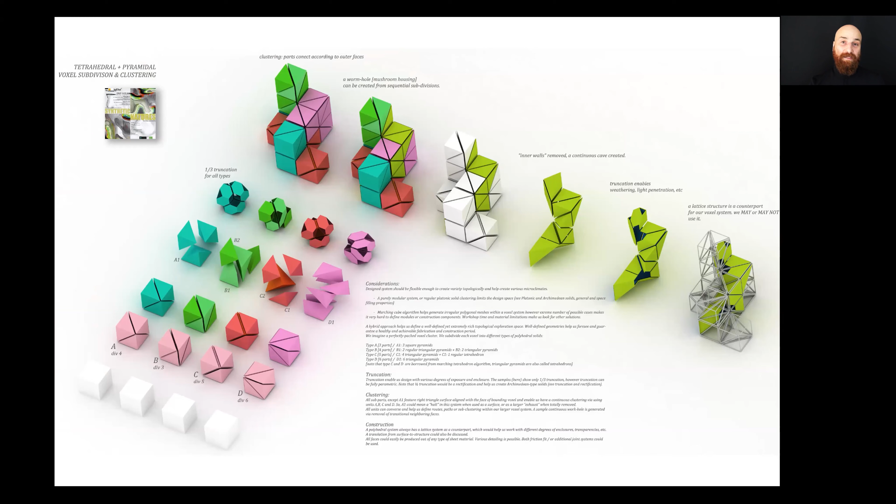I would like to illustrate this idea with a couple of projects that I worked on. The first one is from 2012 when I had a chance to visit Santiago, Chile. The idea in this project was showcasing the potential, the power of digital tools, both in the design realm and the manufacturing realm. In this case, you can take a cube, slice it in different ways, and truncate it in different ways. Then by combining them in different ways, you can build complexity step by step.

At the same time, we were very interested in applying this in computational terms because we had to deal with a sophisticated structure, but also a sophisticated surfacing system that housed electronics as well as some living organisms in it. Here is how it worked.

We picked the spot to put the structure, and then we tried to analyze the environment to see what really happens during the day. That is related to how much sunlight enters a space, what the position of the structure is, and what's going to happen with the living organisms that we put inside the structure.

On the structural side, we really targeted to have something that we could digitally manufacture and assemble without using any kind of adhesive or screws and nails and so on and so forth. So the structures that you see here are really friction fit.

That was a super challenging application on its own, because what you need to do is cut each and every part in really, really tight tolerances, but at the same time make sure that they fit to each other. If it is too small, it wouldn't fit. If it is too large, it would just be loose and not hold the structures together.

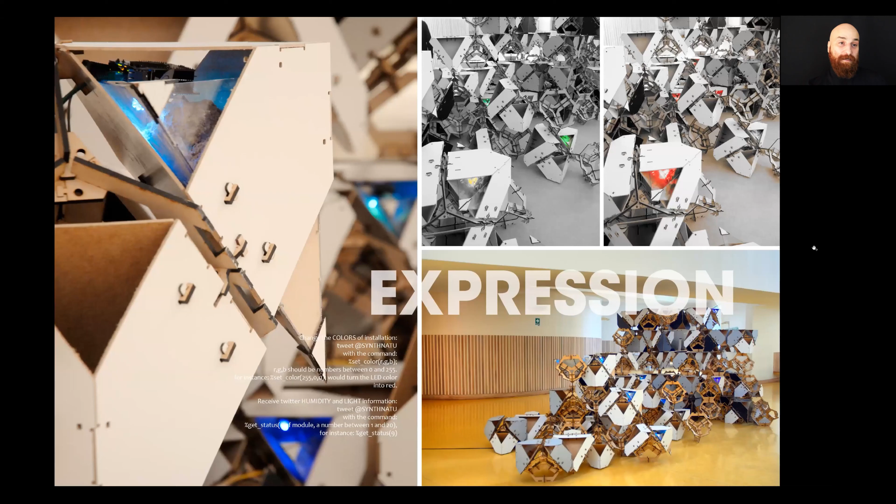On the living organism side, what we did is we put mushroom in those pockets, and the amount of opening in each and every pocket would change depending on the location of the pocket on the structure. Eventually we wanted this to be an interactive sculpture as well, so you would see some LED lights in the structure, and people would tweet some colors to these pockets, and then the mushrooms would tweet back their moisture levels depending on the humidity level that they're at.

So all in all, this was a very interesting learning process for the students who attended this workshop to build the structure. It was a workshop, this was designed, but at the same time we were iterating and reiterating the design as we were building it. So in a way, the design was evolving and transforming over time as we were working on it.

We learned a lot, both in the design process, but also during the manufacturing process. We had to reflect our learning back to the structure and change it whenever needed. So we built this bridge, conversation between the mushrooms and humans, as I explained a second ago. This is a very good example in my mind to show that you have to be very experimental when you're designing things. If we keep doing what we already know, we can only move incrementally. But to take a huge leap in innovation, to come up with new ideas, to be really transformative, we have to experiment.

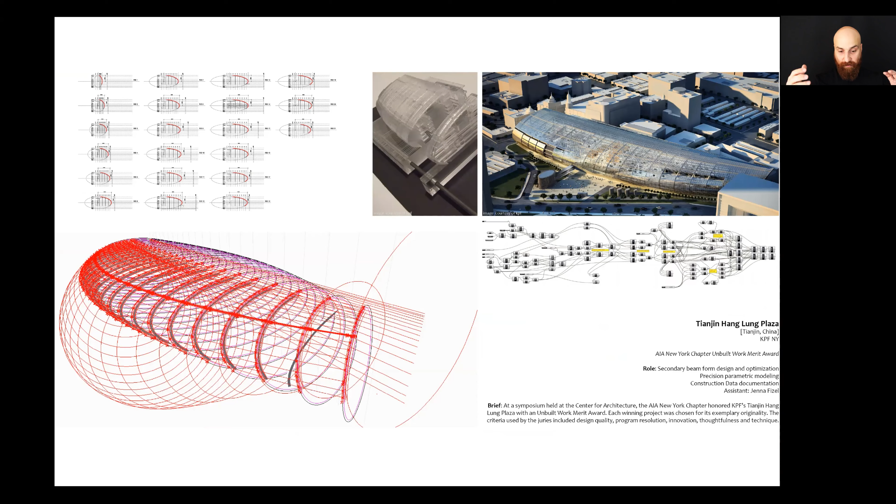Although this building looks relatively simple, it's a fairly complicated building in which the elliptical ribs pull back and scale down simultaneously, creating interesting connections for the beams that need to be put in place. To have a continuous structure, you would need to give some sort of torsion to the beams, and these colors are essentially referring to the amount of that torsion that needs to go into the structure.

I'm using those colors and numbers to describe a structural situation, what needs to happen to the structure for the building to be realized. So in a way, I'm using these numbers and colors to describe something to you. In this respect, we can say data is something for describing, and I'm using this as a tool for description. I can suddenly shift from this huge scale building, which was hundreds of meters long, to a much smaller area, which is your foot.

So what we are doing is splitting the world into parts. In this case, first we are looking into the foot only, then we are looking at the pressure only, and then we're subdividing the pressure into pieces so we can have an understanding of a greater picture. Once we get the information, the idea is to start putting those parts together, and then we make designs. That's exactly what happens in our mind.

It's not that direct though, we cannot really go from data to design immediately. We collect the data, we have to have a method to parse that data, to read that data, and that can be scripting, visual programming, and so on. Then the colors and shapes appear elsewhere, so we give a form to it in 3 dimensions. Once we start mapping some shapes onto the data, then we have, let's say, a design. We call this algorithmic design.

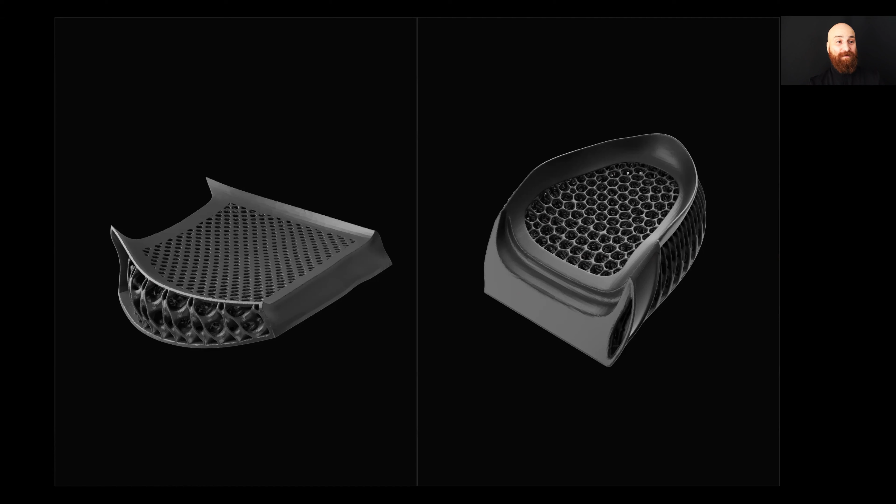The part on the left side is the one I had a chance to design. You would see that the top surface looks totally different than the front surface, and totally different than the side surface. Beyond those looks, everything has to function and fulfill a purpose of supporting your foot and hopefully being bouncy, performing the way you expect.

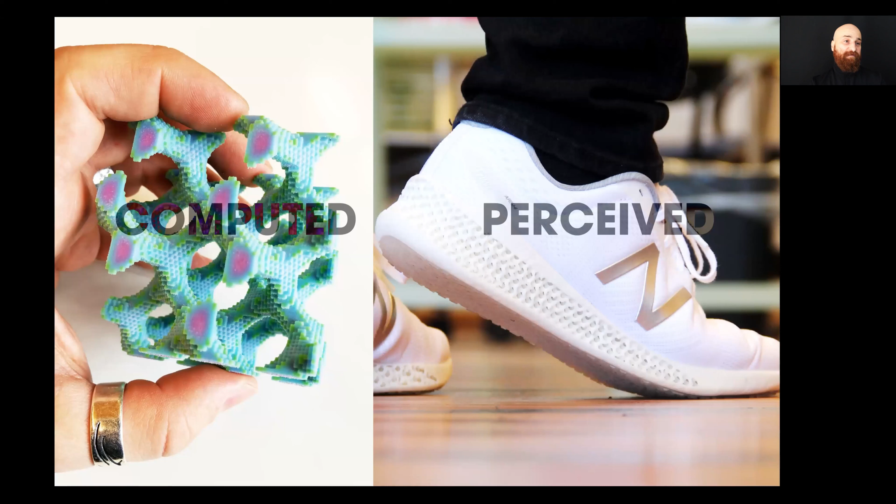Here we have to talk about the transition from digital to real. It doesn't happen immediately—you have to develop a method of going from digital to real, which should encompass the designing process, the testing process, and then the manufacturing process. The computed thing doesn't necessitate that the perception will be great too.

Here we are looking into an intricate, colorful 3D printed model, which looks super interesting. But then you have to shrink the scale so much that it can fit into a midsole on the right side. Beyond that technique and the potential to print it, it needs to feel good—so how can we really do that is the question.

There are lots of steps of computation—you discover a way to make a form, then morphing and blending, which helps you identify different purposes, different zones in a shape, and then change your structure depending on that purpose, so it can respond to that need. Then you distribute it in the right way and have this seamless model. All of this needs to happen on the digital side.

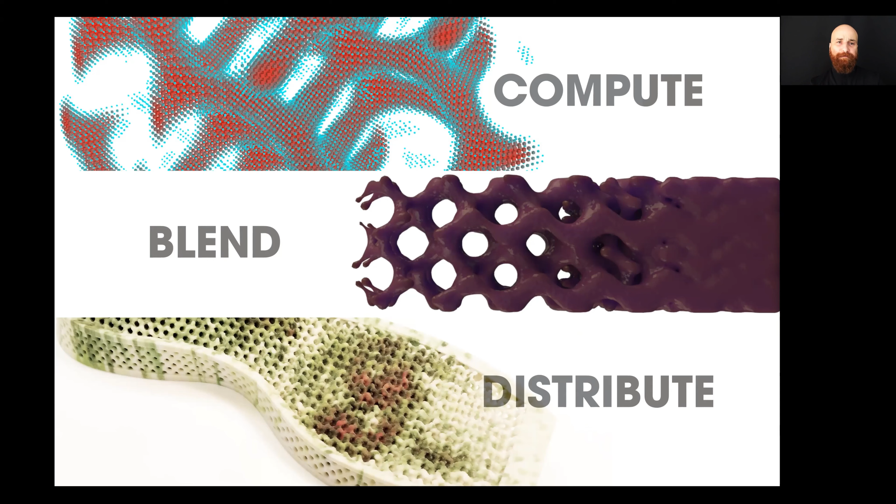While working on the digital side, you know you have to explore—you don't have one single answer at one single moment. You have to diverge, open up the problem, and find different solutions or instances of design at different moments to build an understanding of what you're really doing. This isn't new; it's about design space, which has existed for a long time.

By using these tools, parametric design has been picking up over the last 20 years to explore and understand these ideas. You make a design space and you kind of see your options—that's the idea. Then you can expand your design space even further. These are some very cool images created by my colleagues at New Balance, displaying the structures we looked into, and it's only a portion of what we were doing; we have many more than these.

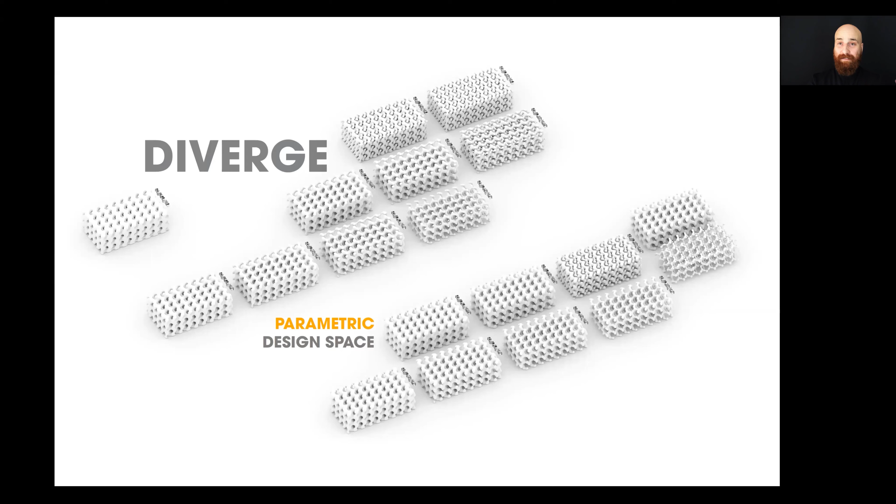So it's not only that you take one single shape like a gyroid and look into its potential, you also expand your understanding into many different structures, some of which are actually inspired by shell structures that we use in architecture. Having that architectural background helps me understand how a structure really works at multiple scales, from buildings to shoe design. You can kind of reflect some ideas.

Eventually what we do is we keep diverging and create this improvised design space, and then we keep making parts. We make a lot of them, test them, document them, and track them, because the idea is once we achieve something, we have that as a milestone. But if we have to go back to another structure that wasn't so good for one purpose but was very good for another, we can track it down and reuse or repurpose that structure.

So this is implying a big shift: parts are changing, processes are changing, methods are changing, the way we test the parts is changing too. You can apply these ideas to buildings too, because in the past you weren't using the amount of simulation that you're using now on digital platforms. Also the construction, the way of construction, is changing—we're incorporating lots of digital manufacturing into architecture today. Same thing applies to shoe design, product design, and so on.

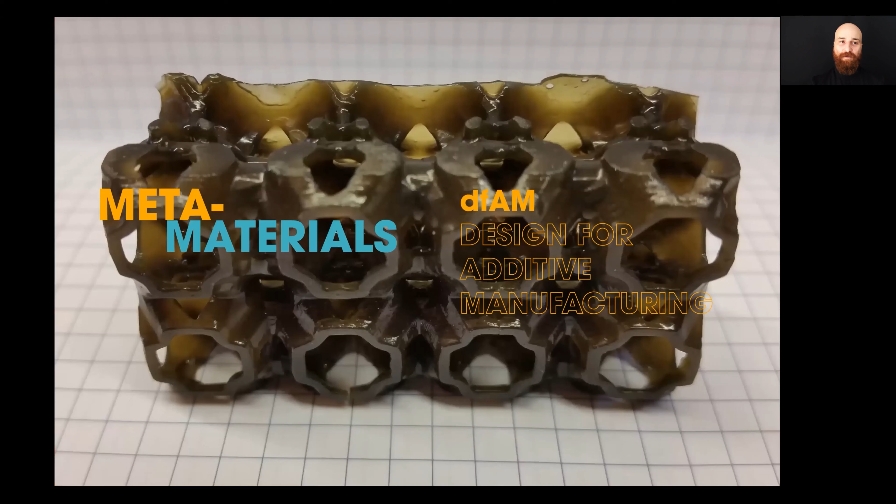So for these industrial design projects, the emergent field of design for additive manufacturing is really important. I gave a two-day workshop for the conference attendees, and we looked into the techniques and crucial points of designing these minuscule structures. If you're interested in this field, please search for design for additive manufacturing.

What we're essentially looking into now is, in the past, for different purposes and performances, we would use different types of materials—same thing in architecture and product design. But today, we can use the same material and just change the shape, ending up creating metamaterials, which is a new field for 3D printing, and it's an expanding field for this purpose.

So what's happening here is there's a transformation, a change. What used to be fully digital—the forms, the surfaces, boundary representations we played with in the digital realm—now we're making solid models out of them really fast, and we are 3D printing them. This is significantly different from conventional manufacturing techniques, because the shapes we're making are much more sophisticated and complicated than what we used to do in the past.

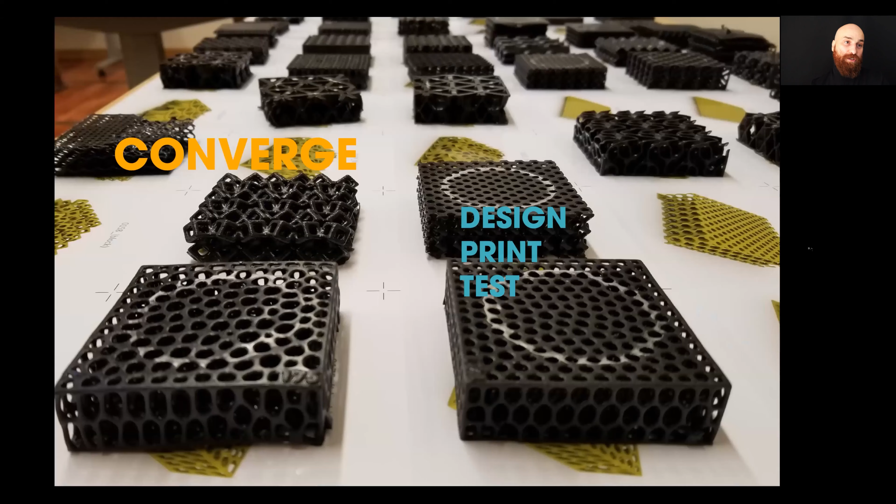As you see in these pictures, you can immediately understand just by looking at the photographs that one side of this structure is super stiff, whereas the other side is super soft, like a brush, so you can bend and twist that portion of the structure. We use this understanding to make a lot of parts, and consider them as metamaterials that we can compare to conventional materials we had.

In this case, we're taking these little shapes filled with structures and comparing them to the foams we used to use in shoes. It's interesting that at the end of this process, using mechanical testing, we produce data again—so we started with data, we made parts, we tested the part, and there's data again. It becomes a cycle, in a way.

These are the two structures that we used in the two shoes I mentioned a while ago. The one on the left is the structure we used in the heel component. The one on the right is the structure we used in the forefoot component that I designed.

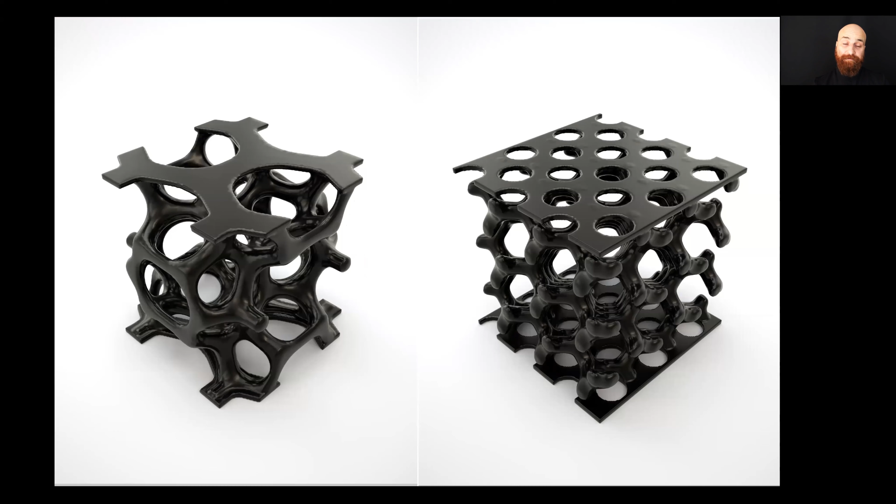So it doesn't end with the internal structure, right? Especially for the sneaker heads, the way the shoe looks is very important as well. It has to look good. You have to like the shoe when you look at it. Same thing goes for the buildings, right?

When we look at a very appealing, attractive building, it takes its part in the history of construction, whereas if it is an eyesore, you don't really want to look at that building.

And in this case, because the scale is so small for these shoes, you have to go into very small details under 1 millimeter, and then work on these flowy forms. But at the same time, we really enjoy making these visualizations to explain how much effort is going into the making of the shoe, how intricate these forms are, and the variety of forms that we are using in these shoes are really extensive, right? So it's kind of like a wide spectrum, they fall into.

Okay, so again, I'm just showing the 3D printed components that we used in these two shoes. We call this Triple Cell, if you would like to check out this technology. And we partnered with Formlabs, who developed the material for us while developing these shoes. And here I would like to share this short video with you to show the process of making the shoe.

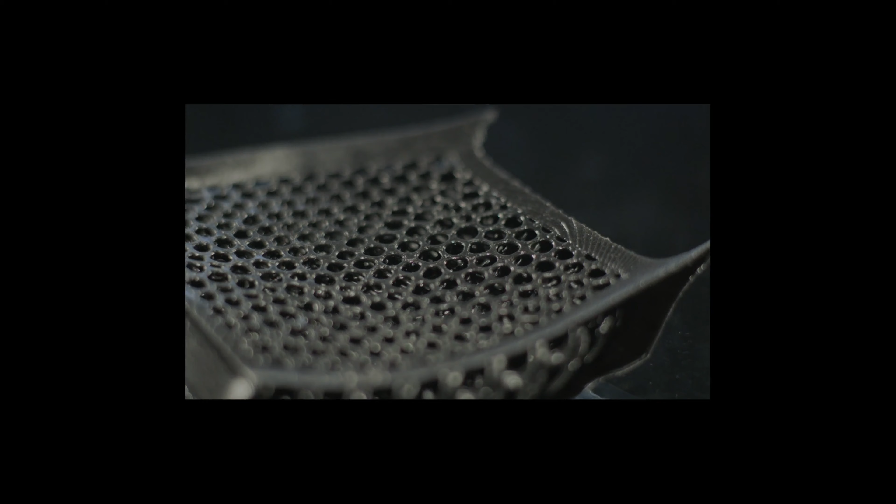We can adjust the structure in any local region to address different aspects of the foot strike, for example. We can take a more supportive structure, like what's on the rim of this part, and blend it with a more cushioned structure, like what's in the core of this part. One day we can really do that on a person-by-person basis and offer a completely unique ride for every individual.

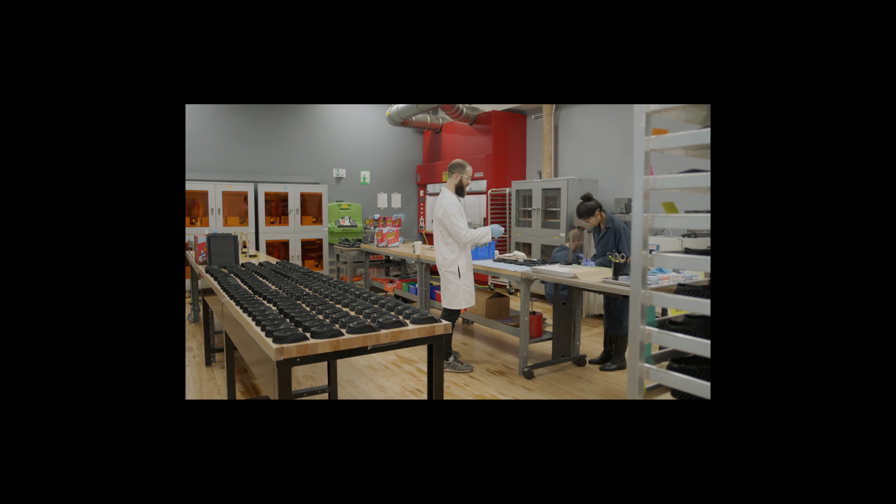The world is changing. People want custom things made just for them that have higher performance, that can ship overnight. We've been working together with New Balance, figuring out how we can go from prototype footwear all the way to small batch manufacturing and then all the way to mass manufacturing.

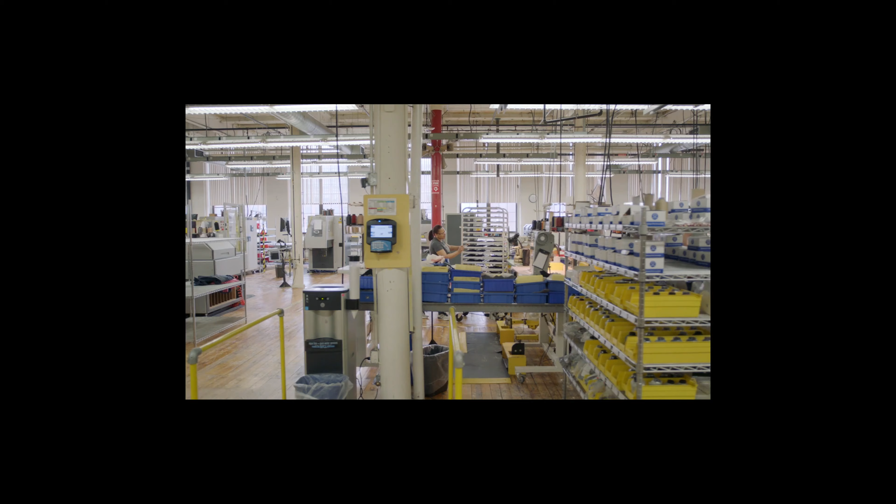We can take all the output from our pilot manufacturing line right now and take it down only 2 floors from where we're sitting right now and assemble into a full shoe. The ability to turn that quickly is going to be a great advantage in the future. Triple Cell is really on the leading edge of bringing New Balance domestic manufacturing into the digital age.

We've really traditionally been involved in operations that are analog and manual, and this is a huge opportunity for us to move into more innovative products that are produced domestically. Through Triple Cell, we're making huge advancements. We're really going to be able to disrupt the industry not only in performance, but also in athlete customization and speed to market. One of the things that's truly unique and special for us at New Balance is that we're developing and manufacturing these components right here in our own factories in the United States.

So briefly, here you can see this is my colleague, and we ended up working a lot together with Chris while realizing these shoes. He's the designer of the heel component that you saw. The process took a lot of discussions, a lot of learning, a lot of iterations and reiterations of these shoes and the design parts.

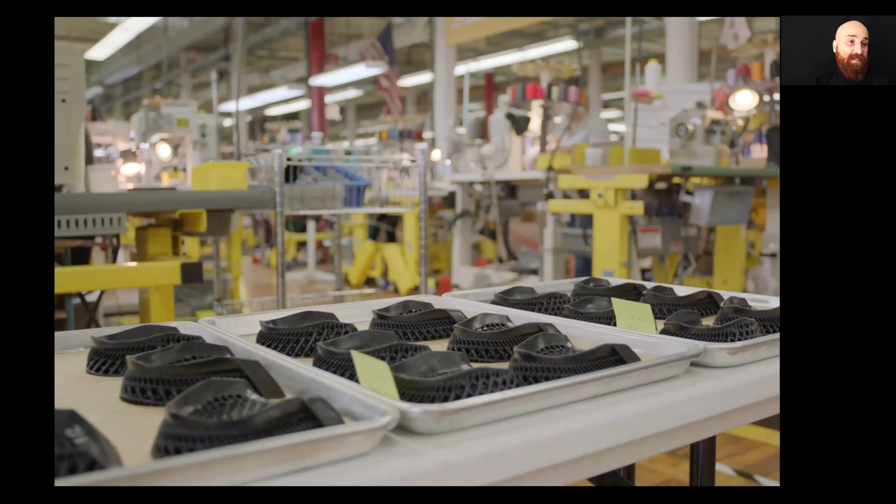Okay, so this is one of the end products, and it's one of the designs that I'm really lucky to have had the chance to design. So again, what happened is the parts changed, right? These parts didn't necessarily exist the way they are, as we're seeing in these images, in the past.

And that is also changing the description of shoes, right? So eventually what's going to happen, what I'm anticipating, is it's going to be maybe with parts first, but then the whole shoe is going to change. We are going to move from this very conventional understanding of a shoe to something really crazy, so the shoe becomes a field around your foot. If you search that, 'shoe as a field,' I had a chance to run this workshop at MIT.

In which we challenged these descriptions of shoes and came up with new descriptions of what a shoe could be. The same idea applies to buildings, right? Buildings are made of parts. You put the parts together and the whole emerges. This is a project I worked on around 2006. I was very excited to be a part of the process. It was a time when generative design was barely picking up, so you would only find a narrow application area for these projects. You couldn't reflect these techniques onto all projects.

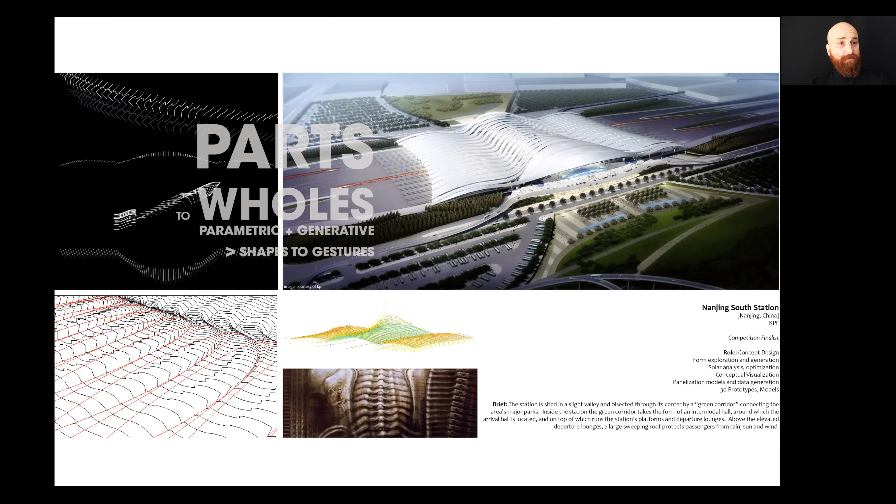This is a huge building. You can see how small the buses are. It's a train station that spans 500 meters by 500 meters, so it's a pretty large canopy. It's interesting in the way that the idea was somehow this flowing, complex but simple form, right?

So it's interesting in the way that our vision creates these images which have no parts, right? It's in our mind, this crazy form. But when we need to realize it, we have to discretize, subdivide into pieces. I talked about this when I talked about the underfoot pressure, right? It's the same thing: we go into the problem, we cannot really understand it at once, so we split that problem into parts, and then we combine those parts back together to generate these forms.

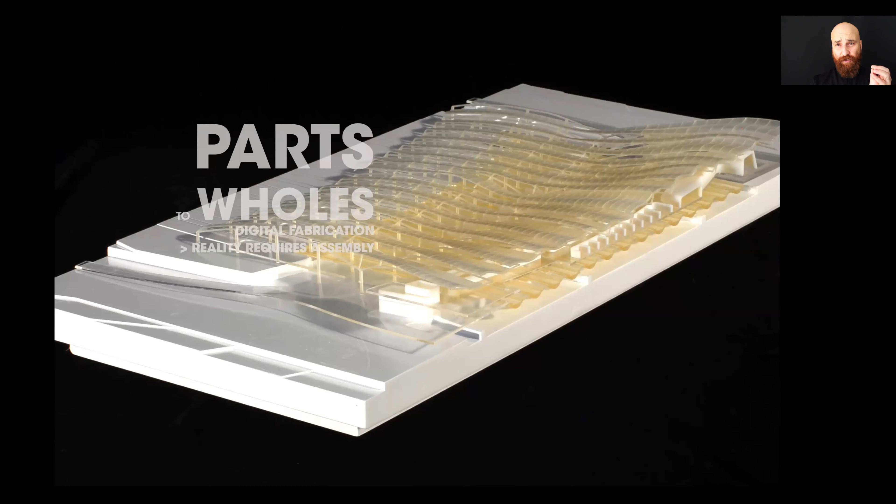And again, we can use digital fabrication to realize both, right? So here, we're using 3D printing, laser cutting, and so on to realize this model digitally to represent architectural integrity. Whereas on the other side, we're using a CNC mill to represent our vision of the structure. So these are two significantly different models: one has no parts, the other has a lot of parts that are put together. This was pretty much a design that I worked on at Kohn Pedersen Fox around 2006.

At the time, I was really interested in creating these forms, but at the same time, the second one was experimenting, right? I was very interested in taking the forms and also working on rationalizing these structures to be constructed in an easier way. So what you see here is this building, and the design is almost done.

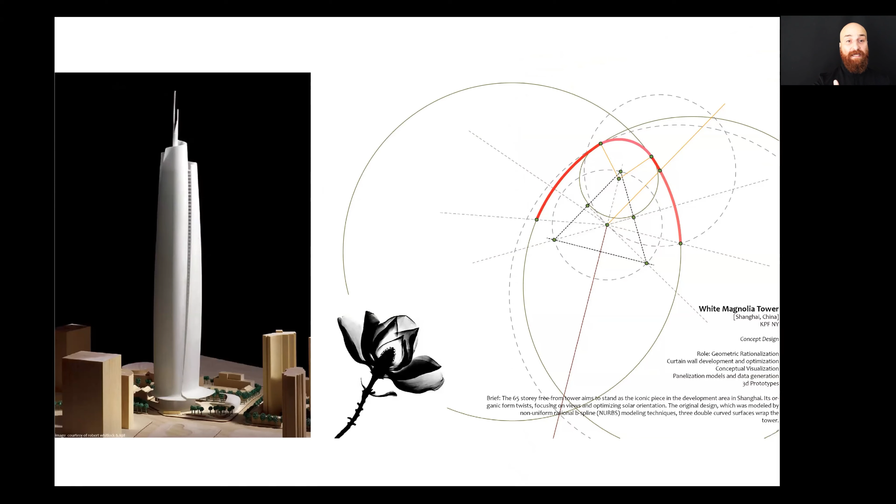So you have to go back to it and generate the floor plans in a way that you end up getting a smoother surface for the building to be constructed in a simpler way. So what I'm doing here is keeping the visual expression of the building while simplifying the curvature values of the building.

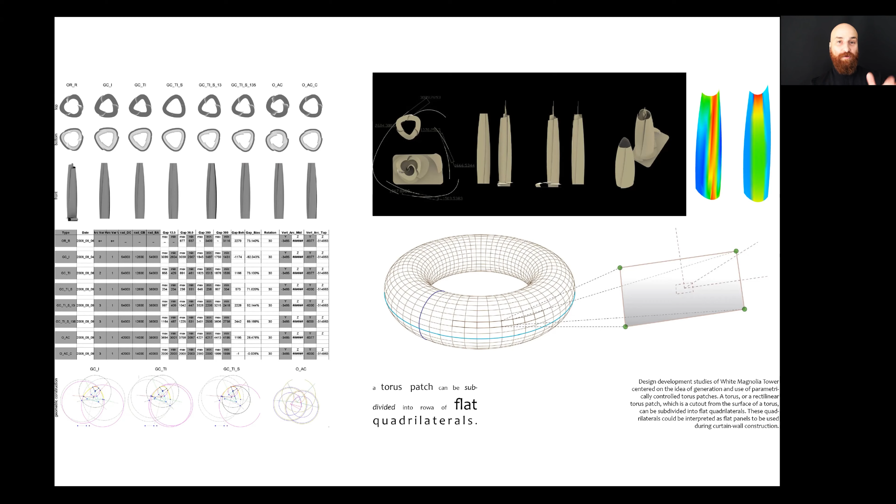You can see on the image on the right side the colorful difference between the rationalization and post-rationalization of the building. But it doesn't end there, right?

Once you see forms like that, that's a very interesting building form. You also want to go crazy and make these interesting forms on top of it. So that's the experimentation part, and I had a chance to work on that side too.

All these models, with the train station as well, were exhibited at SIGGRAPH in 2008. And I also had a chance to talk about these processes and write an article about it, which was published in this book.

So if you're interested in reading about the foundational ideas about parametric design, this is one of the greatest books in the field, by Robert Woodbury, and I had a chance to contribute to it too.

What we do, or what we used to do a lot in the past, by using these generative and design tools, was generating patterns. Essentially what I showed you about the shoes is the same thing. It's a pattern, a very sophisticated pattern in 3D.

But in the past, or still in architecture, what we do is make patterns in 2D. And for this project, I was really interested in creating a language of pattern which can be read by humans, but at the same time by computers.

So you can see my hand sketches, right? I'm trying to come up with this language which only has, let's say, 10 to 20 different parts, but which are only achieved by using 5 or 6 different parameters.

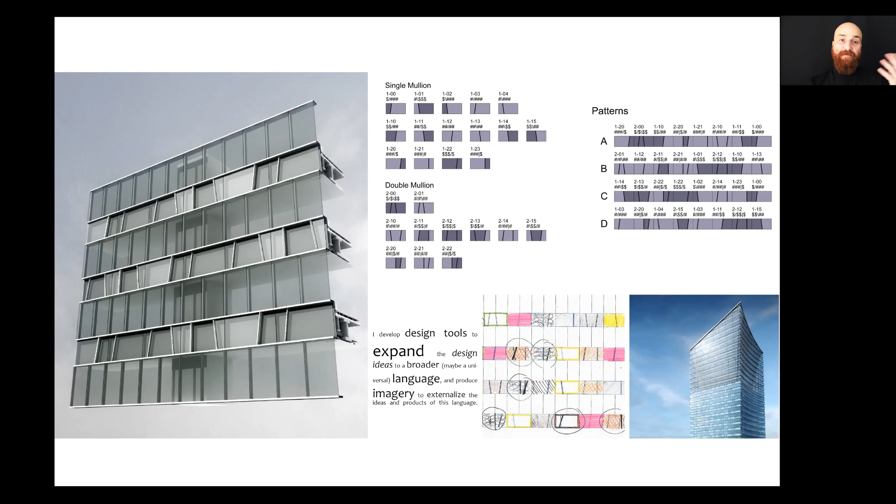So you would have panels that are in the front or at the back, and you would have mullions that are tilted right or left. And then, once you convert that idea from visual into a code, then you end up getting something like this.

So this is a code that can be read by a machine, right? Because you have all the information about the panels, but also visually it can be read by a human, saying, oh, okay, this panel is that type of panel.

So I really enjoy building these bridges between the two realms. But at the same time, it is very important for me to explicate and describe these processes. So what I ended up doing in the past, or what I'm doing now at work, is always getting these pseudocodes prepared.

So it's not only the design process that we deal with, but we also deal with the process of making it. So how do we make something is very important, and we have to explain to other people that way of making.

And here we are showing the logic board, step by step, of what happens where on the generative design side when we're using this tool.

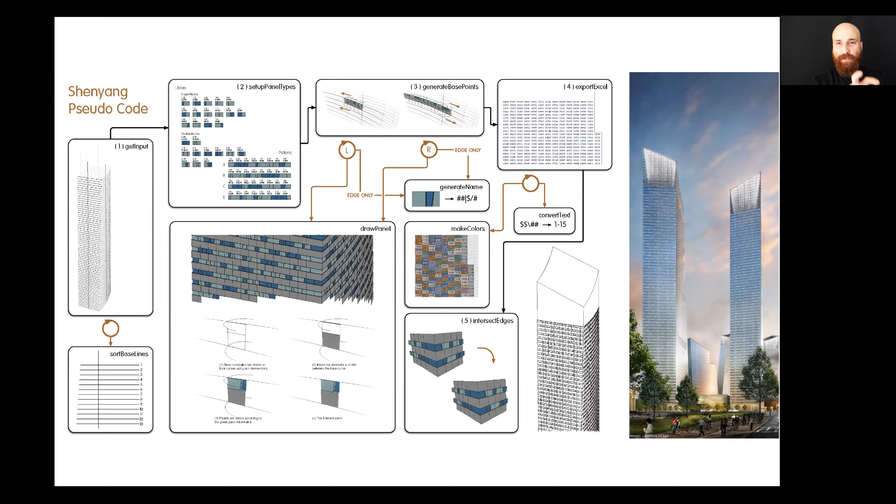And the second thing is I'm switching to a project, but it's very related. It's a pattern project too, and I can jump to its pseudocode again, which is slightly different, using different parameters to make these shapes.

But what's essential is that computers don't always generate satisfactory results. They don't always create what we are looking for, right? So at that moment, you have to empower the designer.

You have to give the tools to the designer so the designer can go and change whatever he or she thinks needs to be changed. So in this case, you would see this red circle right here.

That circle is showing the panel that checks the neighbors and updates itself according to that. It's an automated process of self-awareness for the tool, trying to keep the panels slightly different from each other in one single location, so the design doesn't get boring.

But does it really solve the problem of not having the desired result? Not really—you can still get undesired results. So we ended up putting these smaller circles that you see here, and literally the designer would go and click those little circles to change the rows if he or she wasn't happy with the design.

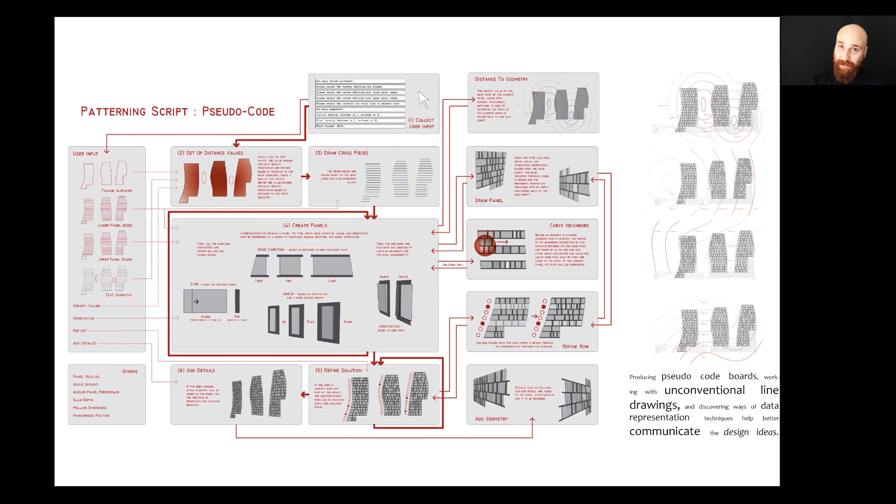So this is to really reinforce the idea that designer comes first. Whatever simulation, whatever tool we use, they create some suggestions for us. The computers create suggestions, but not necessarily a full solution. So we have to keep a door open to change those designs, because designers keep seeing, right?

You would remember that duck, rabbit, crocodile example. In the case of this building we saw a moment ago, the seeing, like the vision, is not really satisfied, so we have to change our mind, change our idea, and change the design. This relates to the tools we're using today. We can use generative design tools, but whatever we look at is super dynamic. They change all the time.

In a way we realize that the parts can change. I've been talking about this part-whole idea, and I keep writing about this too, so you can check my Medium page on that. Parts always change, and the wholes that we look into are not necessarily made of clear parts. So we have to switch between the ideas of parts and the ideas of wholes, and they have to remain really dynamic for us to be transformative, to move to the next thing.

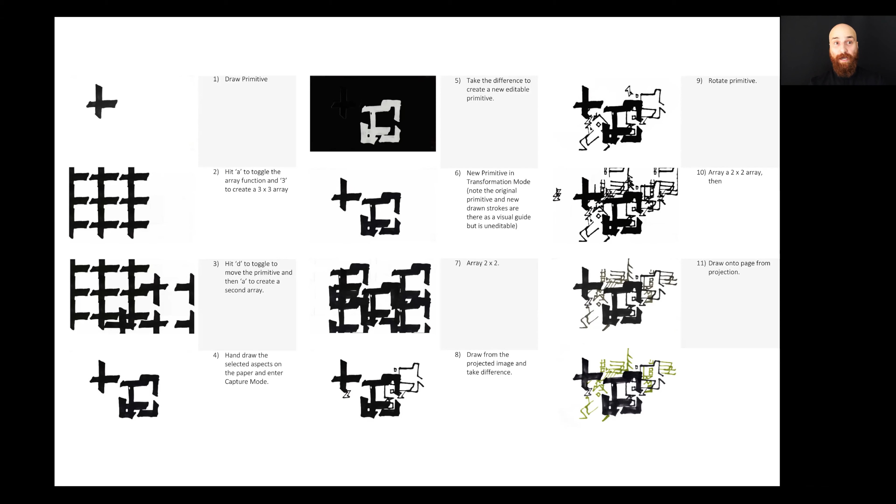We can always talk about this in terms of computation too. I can keep seeing, I can keep drawing, but at the same time I can explain this as a step-by-step procedure that can be described in computational terms. The difference is if I hand this to a computer, it probably generates whatever is predefined before. But here, what I'm doing is, at some moment I'm switching from tracing the dark areas to tracing edges, right? That's my decision. I'm changing my mind and coming up with a transformative technique on the way. So we have to use this, the power of being human.